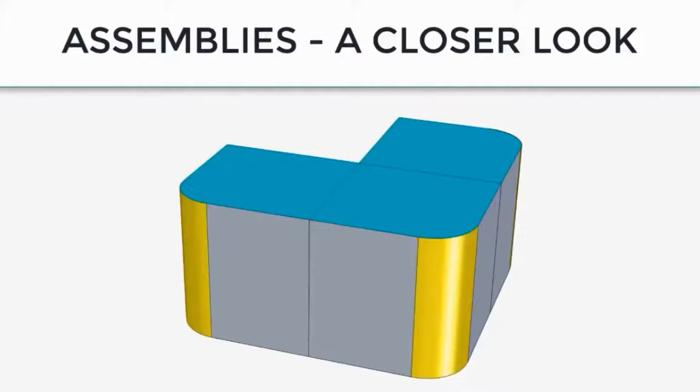Now exit out of the part that you're already in, and I'd like to open up a new assembly file, blank, empty assembly file. And I want to go back to the parts library and take a closer look at this. And so I'm going to go back and drag in my block into my new empty file and take a different approach. And so I'll go back to the parts library and drag that block in again.

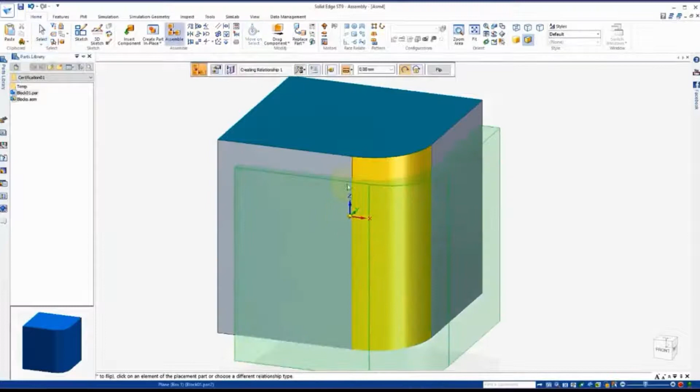Now the first thing I'd like you to pay attention to, if I just drag it in the middle of the screen, it puts it right on top of the other part, and so it makes it harder to work with. So I'm going to hit undo, and when I drag in the block again, I'm going to put it out of the way to give me some room to work. So now if I hit fit, I've got some room to work here.

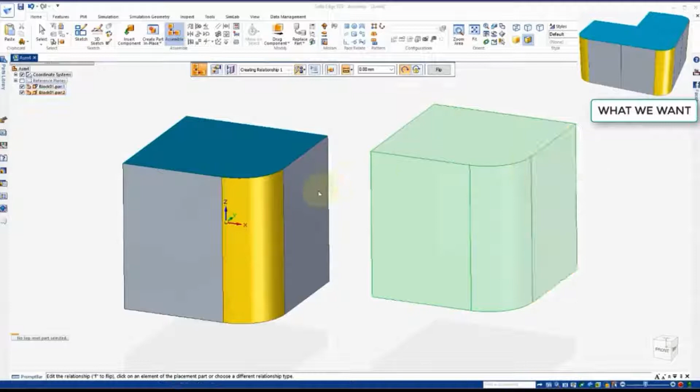Now it defaults to something called flash fit, and it's waiting for me to say I'd like to align this with this face or whichever face I select. But instead of using flash fit, I'm going to hit escape. But before I do that, I'd like you to see up here under assemble how these buttons are grayed out. And these are the critical 3 assemble buttons that we're going to use. But again, they're grayed out because flash fit is operational.

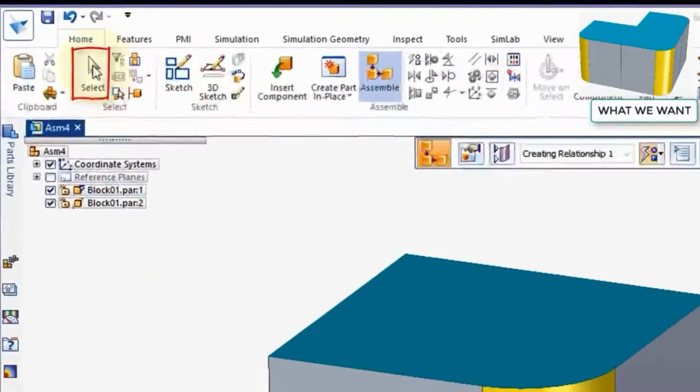But if I go and hit escape or select, now see these buttons are active. I could go back and use flash fit, or I could mate, and I could planar align. So let's go and do that. If I'd like this face to mate to this face, I'm going to go up here and use the mate command. I'll select the mate command, and I'll select this face and this face.

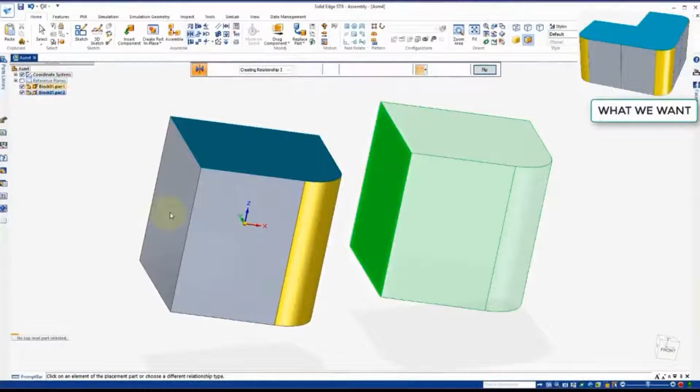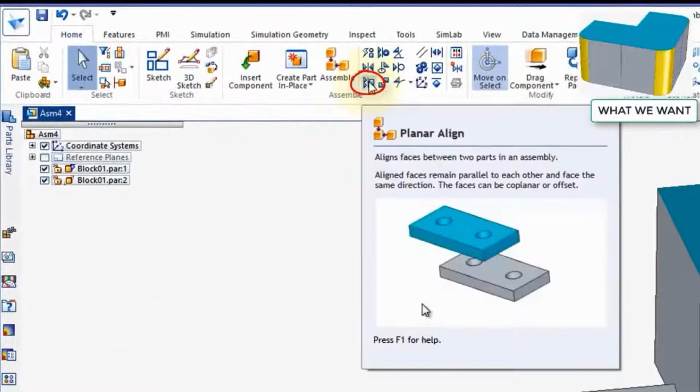Now if I fit that, did it actually do what I wanted? Yeah, those two faces, if I look at the front view, they're face to face now, mated together. I just need to use some other constraints to straighten it up more. But I'm going to hit select again, escape. This face, and I can see my colors now, and so now if I go up here to the planar align, I'd like to align this with this. And again, I'm going to hit select just to see where I am.

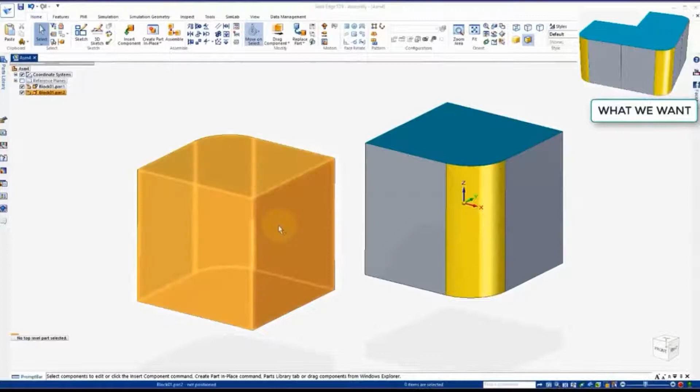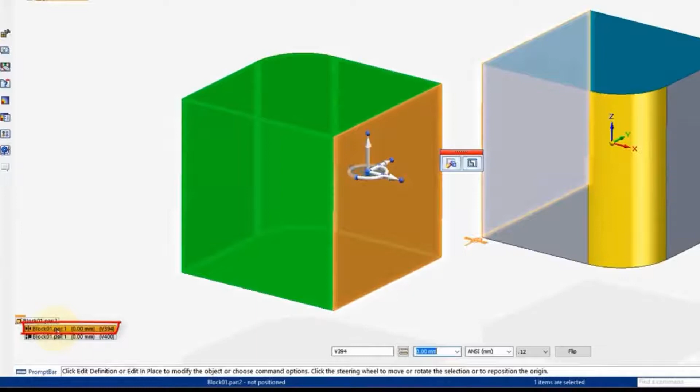Now I've actually made a mistake, and I actually wanted this face here to be mated to this face here. So to fix this, I need to identify this block, the second block that I pulled in, and say, tell me about yourself. And if I come down here, I see it's got 2 constraints. It has the planar align I used there, and it has the mate I used right there. So, well, I really didn't want these 2 faces mated together. So again, if I touch down here, where it tells me about my constraints, I can just right mouse click and say delete the relationship.

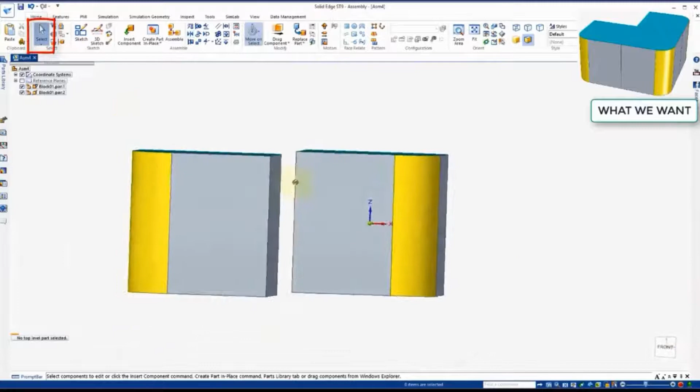And now, if I go back and hit escape again, I can go back and say, look, I really wanted to mate this face with this face. I'm going to hit select again to see where I am. And these faces are mated together. Now what do I need to do? I need to go down to the align command, planar align this with this. And now they're lined up.

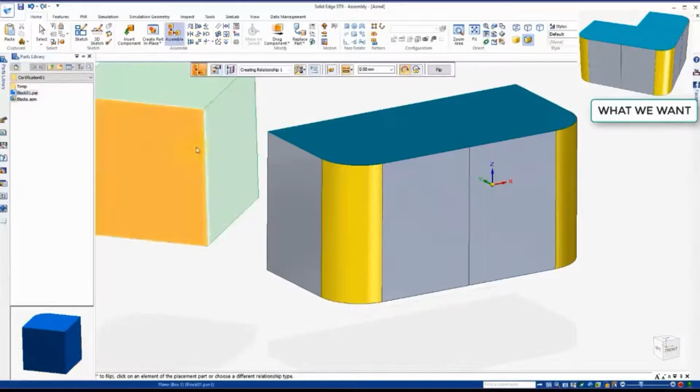Now if I go back to my parts library and I want to bring in the block again, but this time I'd like to rotate the block around because I'm actually going to mate these back faces. So I'll rotate it around, and then when I drag the block in, it comes in that position. So it's a lot easier for me to work with. And then I can simply click on this, and if I use FlashFit, I can click on that and that because I'm using FlashFit.

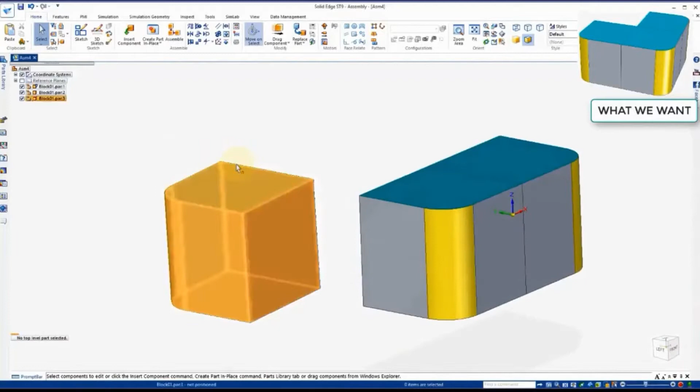Now again, if I want to escape out of this, I just hit the select or the escape button, and then I would simply say I've got those 2 lined up. So now I would line up this. Let's do a planar align this with this, and a planar align this with this.